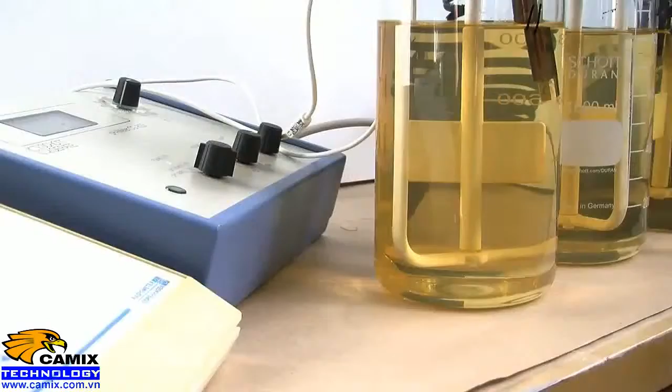On water and wastewater treatment. In addition to ordinary jar test apparatus and the most common analytic facilities, we have a few laboratory and pilot-scale apparatuses that can be used to demonstrate the most common processes and operations in water and wastewater treatment.

In this presentation, we'll introduce our pilot-scale waterworks, benchtop electroflotation cell, pilot-scale membrane filtration unit, and benchtop wastewater treatment plant based on the activated sludge process.

Here we have before us two glasses of water. On the left, a glass of water drawn directly from the Kyrö River, from which the city of Vasa takes its raw water. On the right, a glass of water that has been treated with our benchtop scale waterworks here at our laboratory at the Vaasa University of Applied Sciences.

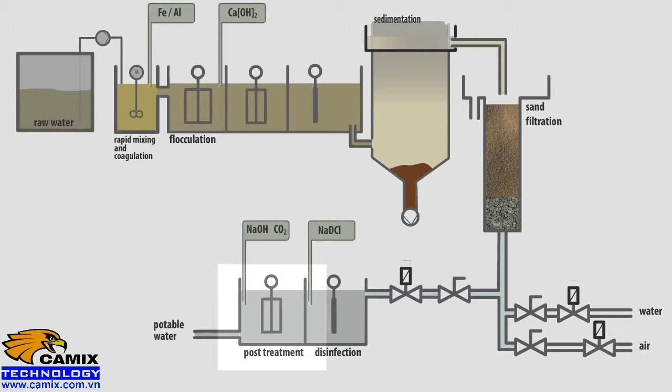The apparatus is fully automated using PLC control and handles the following unit operations and processes. The first stage, clarification, is basically an aesthetic consideration, as people prefer to drink clear, transparent water. The second stage, disinfection, is fundamental: removing pathogens from the water is part of basic healthcare infrastructure. The third stage involves post-treatment to protect the distribution piping from corrosion.

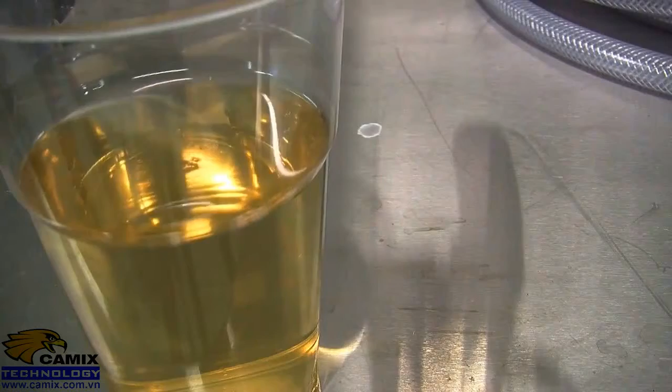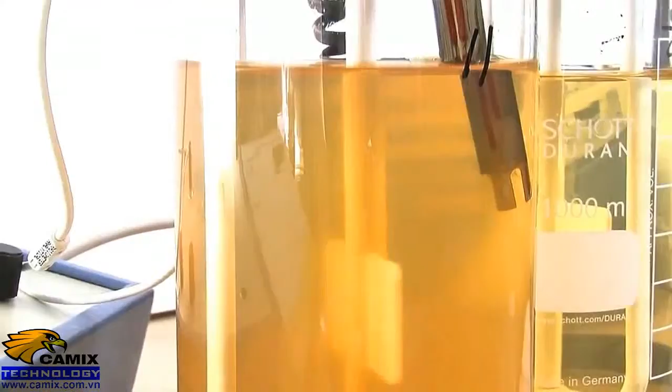The color and turbidity of river water is caused mainly by colloidal-sized clay particles and humic substances. Although the density of these materials is higher than water, the particles do not sediment due to the small particle size. Chemical precipitation using iron salts encourages humus and particles to coagulate, forming bigger flocs that can be separated out.

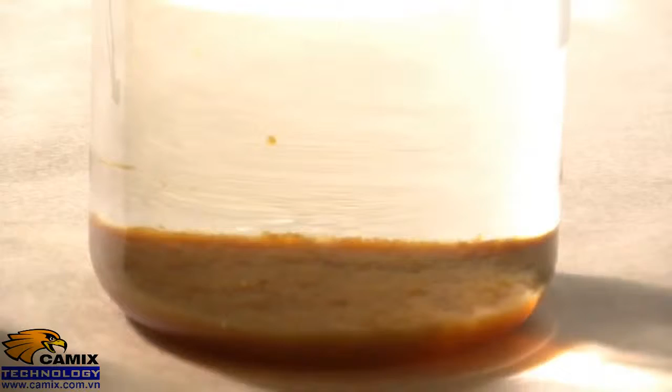The first step involved in chemical precipitation is coagulation, the destabilization and initial coalescing of colloidal particles occurring on an extremely short time scale during the rapid mixing stage through the action of iron sulfate, the PIX 322 commercial product of Kemira.

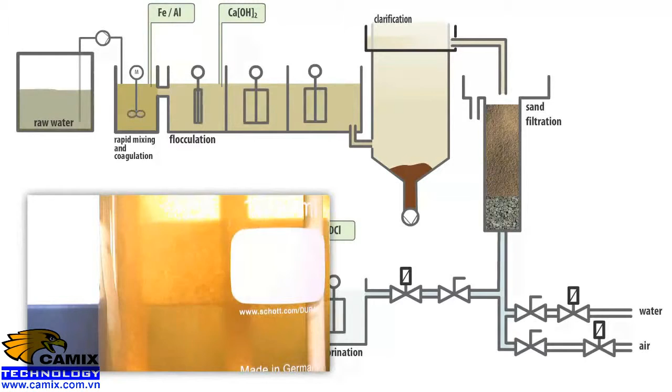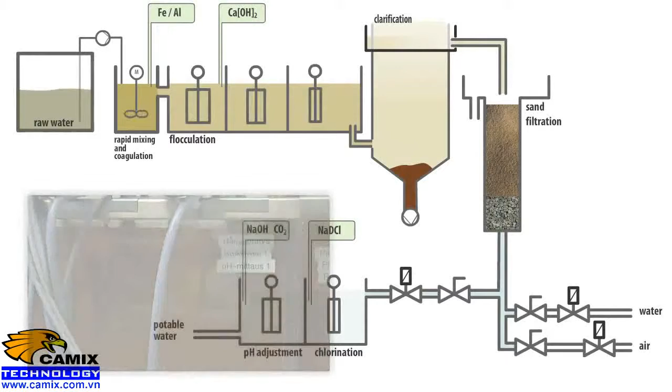Flocculation is the longer-term process of growing larger particles from smaller particles formed by coagulation. During the low-intensity mixing in three consecutive basins, colloidal particles are bound to the resulting iron hydroxide.

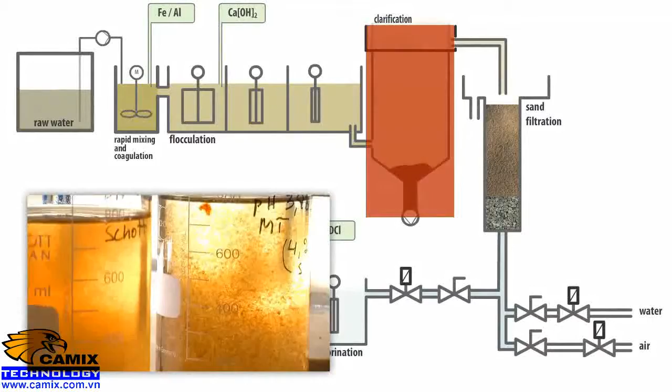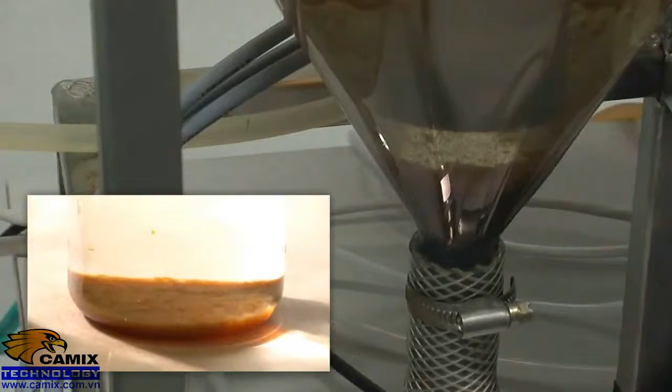During sedimentation, the iron hydroxide flocs entrapping the impurities are separated out by allowing them to settle to the bottom of a vertical flow clarifier. The flocs have a higher density than water and therefore tend to sink. The resulting sludge is pumped out from the bottom of the clarifier once every other hour.

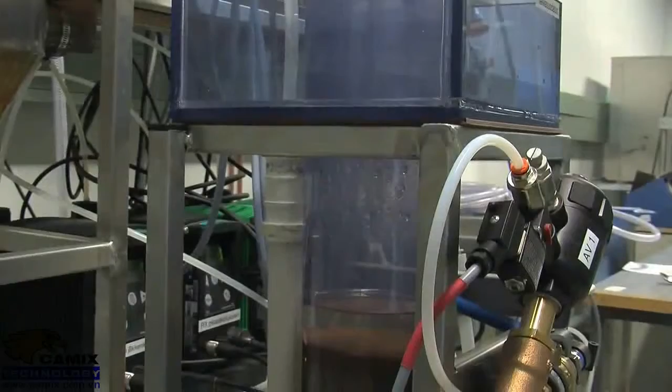The rapid sand filter separates the remaining flocs, those that were not trapped in the clarifier. The sand filter is set to backwash with tap water and air at predetermined times, once every 24 hours.

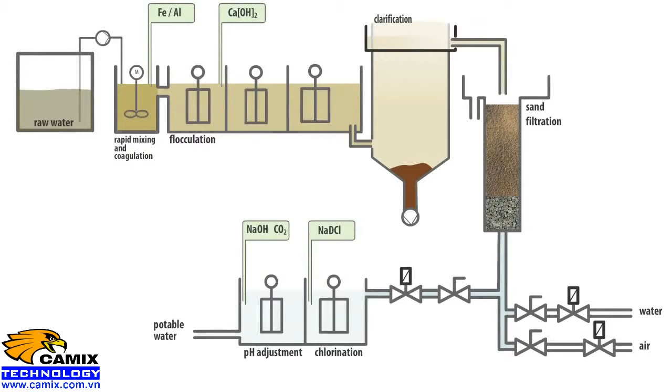After the chlorination stage, the pH value is adjusted by sodium hydroxide and carbon dioxide in order to protect the distribution piping from corrosion.

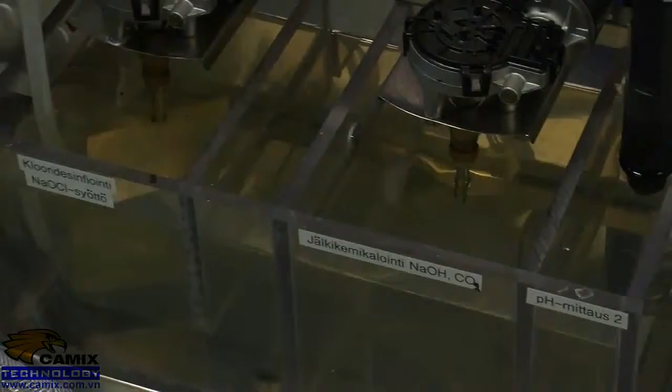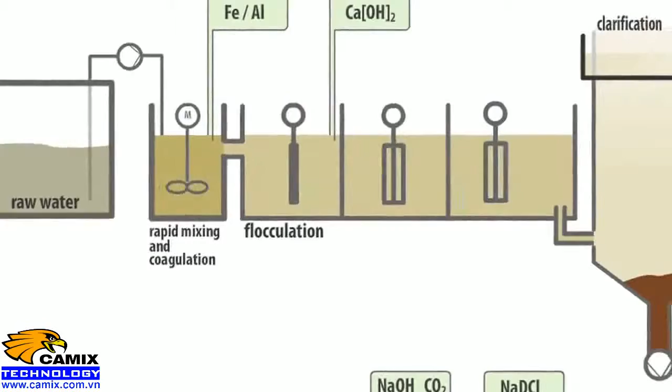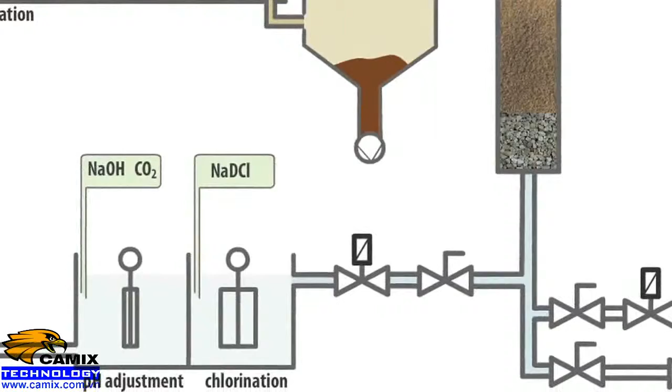The unit operations and processes demonstrated by our benchtop version are the basic elements in all treatment systems of surface waters. Depending on the installation and local conditions, various other unit operations, for example membrane filtration, may be included.

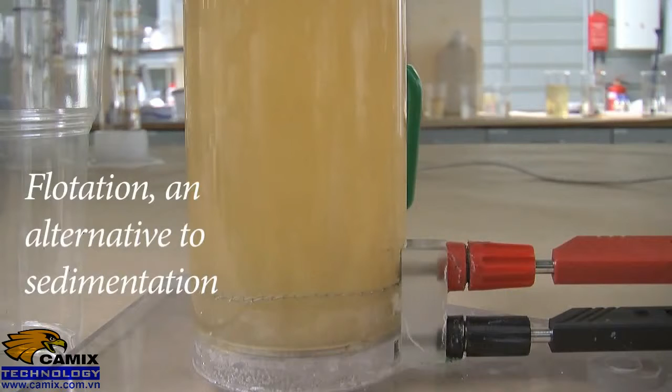As an alternative to sedimentation, clarification is often implemented by flotation. Flotation, in a sense, is the opposite of sedimentation. In flotation, the floc particles are induced to rise to the surface of the tank by entrapment of gas, usually air, within the mass of the floc.

The resulting floc-bearing foam is skimmed off the surface of the flotation cell, and clear water is decanted from a lower level of the cell.

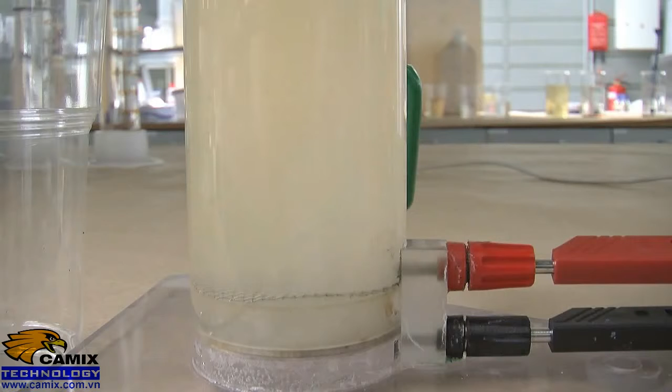In the laboratory of the Vaasa University of Applied Sciences, we have a laboratory-scale benchtop flotation cell. However, it is somewhat unconventional as it uses electrolytically produced hydrogen and oxygen as the flotation gases. Due to this electroflotation technology, the apparatus is small in size, highly portable, and convenient for even classroom demonstrations.

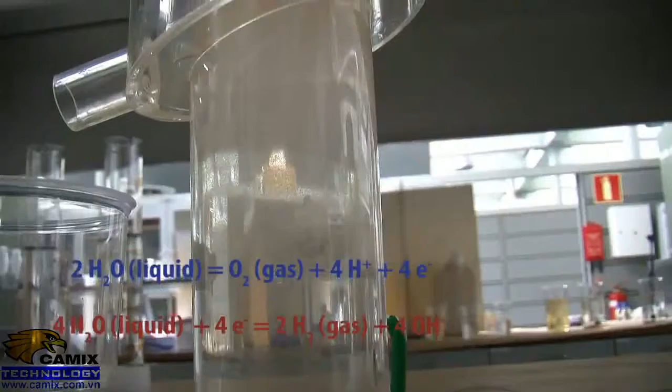In real-life applications, the main advantage of electrolytic gas production is the extremely small size of the gas bubbles produced. However, due to economic considerations, the technology is at present used mainly in niche applications.

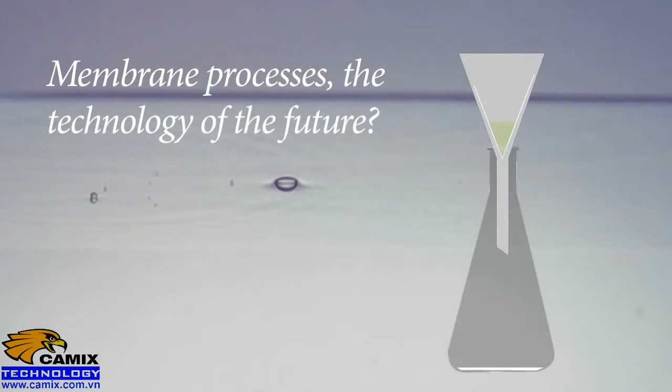Conventionally, filtration in water treatment refers to the separation of solid particles from water streams. Membrane filtration, however, extends this application to include the separation of dissolved solutes.

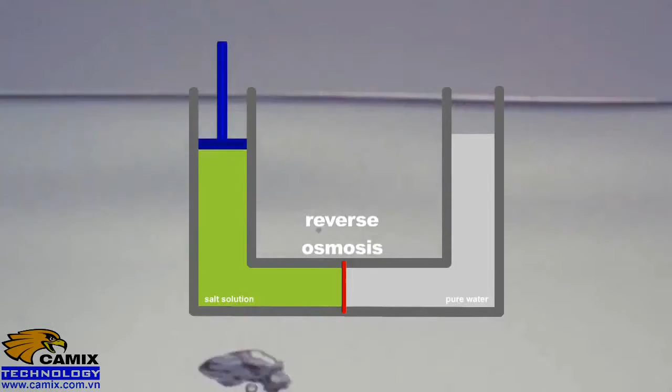Probably the best known membrane filtration technique is reverse osmosis, used for the desalinization of seawater. It consists of forcing seawater with a high-pressure pump through a semi-permeable membrane that allows the passage of water, but not of dissolved salts. This process is not a simple sieve separation, but the main mechanism is diffusion of solution through the membrane.

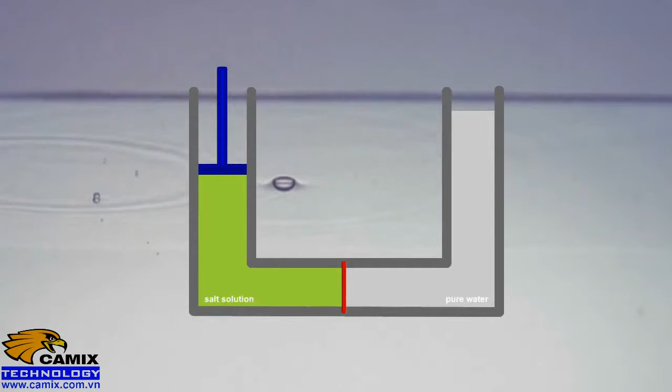Other more common pressure-driven membrane processes are microfiltration, ultrafiltration, and nanofiltration, which can be classified according to the mean pore size of the membranes and the operating pressure.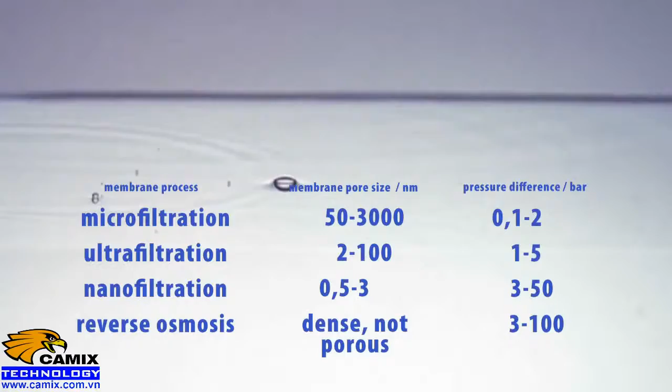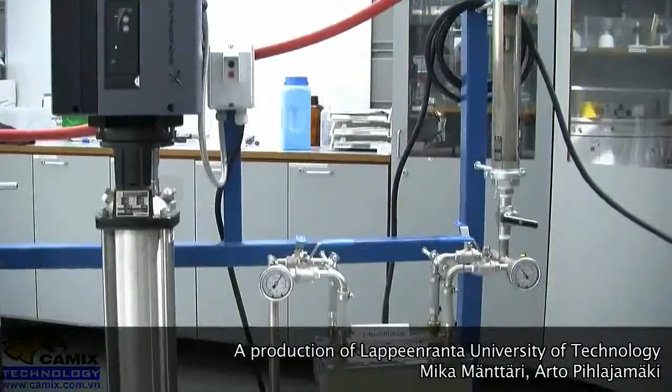In the environmental laboratory of the Lappeenranta University of Technology, we have a laboratory-scale membrane filtration apparatus which can be used to demonstrate all of the above-mentioned techniques.

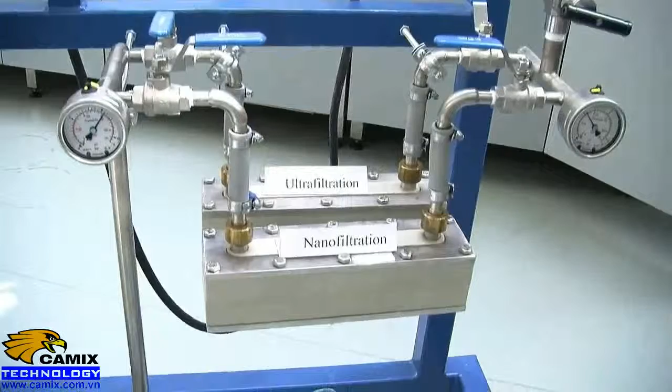Our apparatus is based on the cross-flow principle. In a conventional filter, flow is perpendicular to the filtering medium, and all flow passes through the medium. In a cross-flow process, however, the raw water is fed parallel to the filtering membrane, with only a certain proportion of the flow passing as a clear permeate through the membrane.

Thus, rejected material tends to be carried with the reject water, enriching the concentrate or being continuously removed from the filter module. One advantage of this implementation is that the flow is continuously flushing the membrane, retarding its fouling, that is, the accumulation of dissolved species at the membrane surface and in the pore.

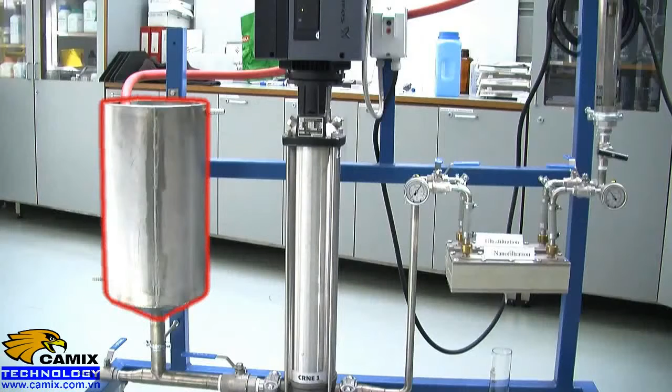Our apparatus consists of a 30-liter feed tank, one centrifugal pump producing operating pressures up to 16 bars, 2 parallel lines of water flow, 2 parallel flat sheet membrane modules equipped with pressure meters at both input and output ends, and a flow meter.

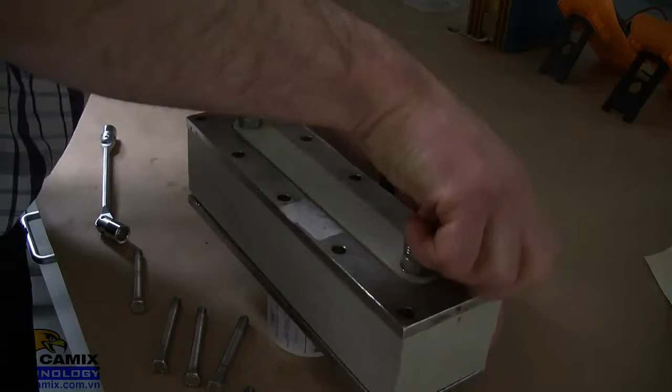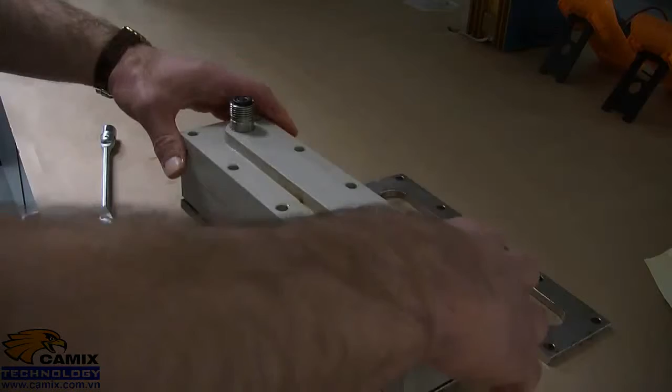The membranes can be easily exchanged as the flat sheet module is easily detached. The module consists of several components, and the filtration area is 68 square centimeters.

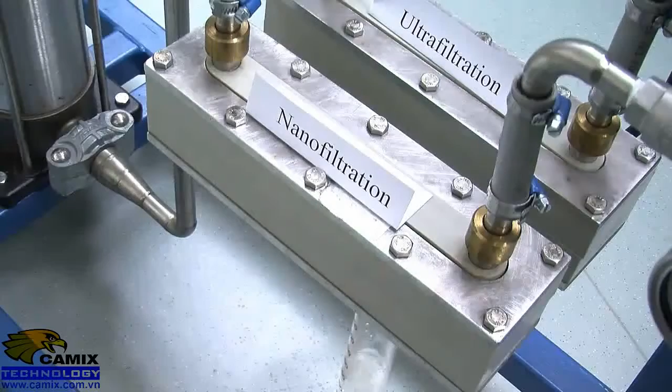In this demonstration, humic substances are removed from the raw water. We have a nanofiltration membrane in the front cell and an ultrafiltration membrane in the back cell.

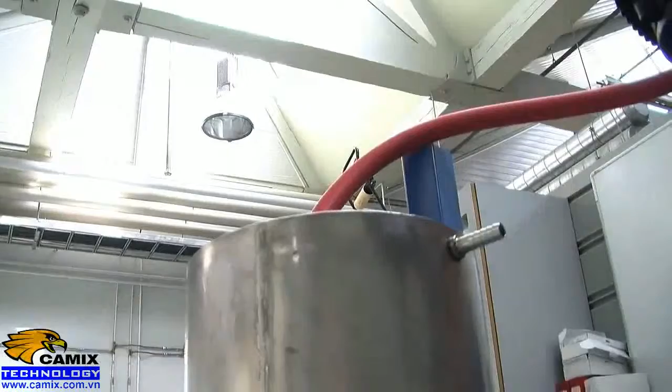The humic containing brownish raw water is pumped from the feed tank through the membrane module and the flow meter, and circulated back to the feed tank. The permeate is collected in measuring cylinders.

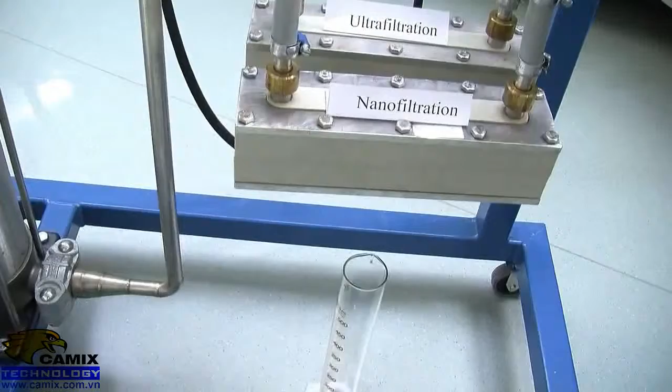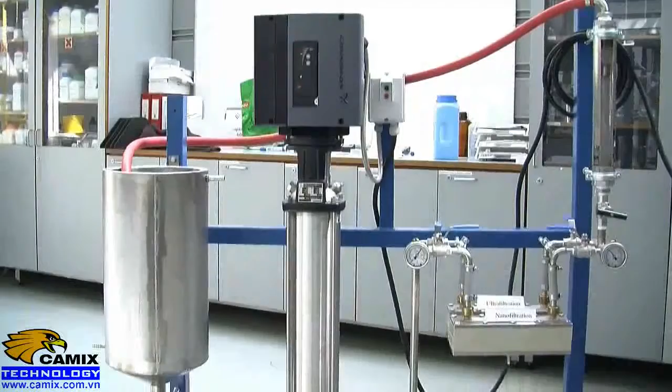As the membrane used in ultrafiltration is leakier, the permeate flow, and consequently the flux, is greater. However, nanofiltration removes a wider range of impurities.

Normally, the first goal of wastewater treatment is the mechanical removal of solids such as rags, twigs, scraps of food, and dead rats, by means of screens, sand traps, and sedimentation basins.

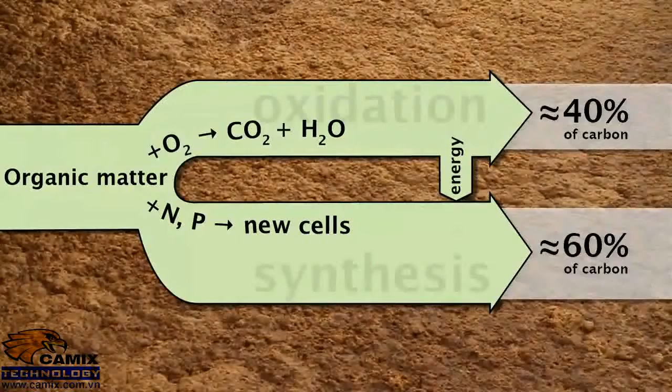Biochemical oxygen demand, that is BOD, is a measure of the concentration of biodegradable substances in wastewater. Organic compounds in effluents are rapidly oxidized by the catalytic action of microorganisms, in other words bugs, utilizing oxygen withdrawn from the air. If the BOD is much greater than the available dissolved oxygen concentration, all oxygen may be depleted.

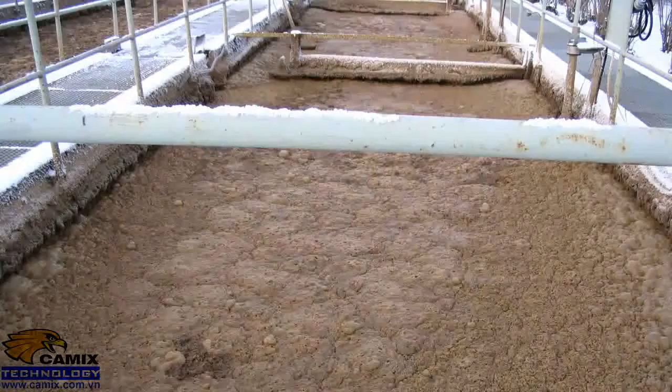In order to minimize the consumption of oxygen in the recipient water bodies, the second goal of the treatment is to oxidize the wastewater as completely as possible in the treatment plant.

Phosphorus and nitrogen are the key nutrients that cause enrichment of natural water bodies, giving rise to excessive growth of aquatic plants and algae, a condition generally known as eutrophication.

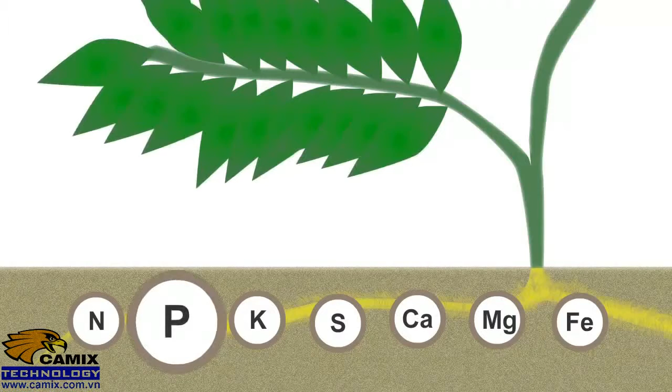In most freshwaters, phosphorus and nitrogen are the nutrients which limit growth because of their limited availability in the natural aquatic environment. Hence, the reduction of phosphorus and nitrogen to a low level is the normally specified third goal for wastewater treatment.

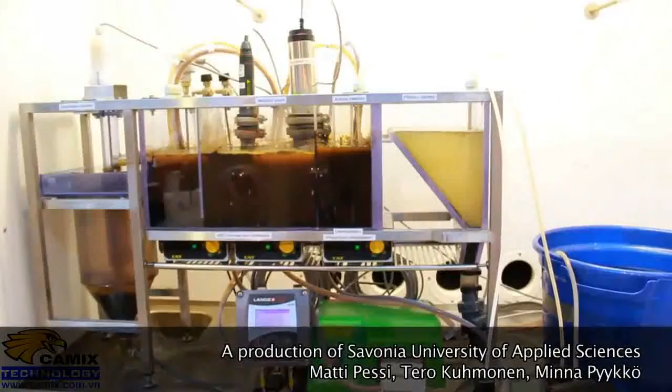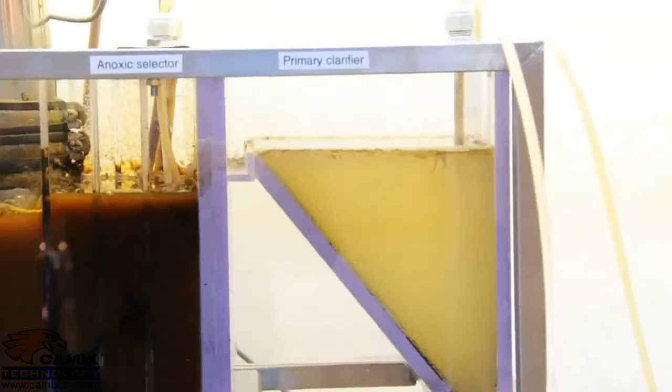In the environmental laboratory of the Lappeenranta University of Technology, we have a laboratory-scale activated sludge plant. Our benchtop apparatus consists of a primary clarifier, an anoxic selector, a 10-liter aeration basin, and a secondary clarifier.

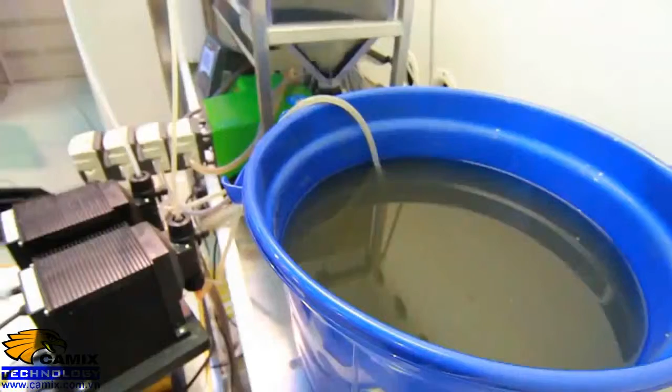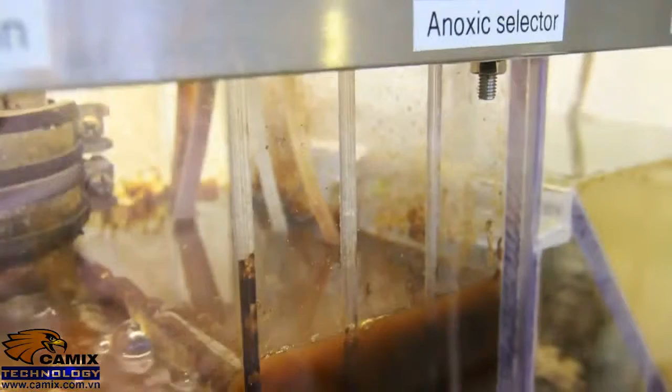The incoming effluent is pumped to the primary clarifier, then flows gravitationally via the anoxic selector to the aeration basin, where the microorganisms in the activated sludge take up and degrade dissolved organic contaminants in the effluent.

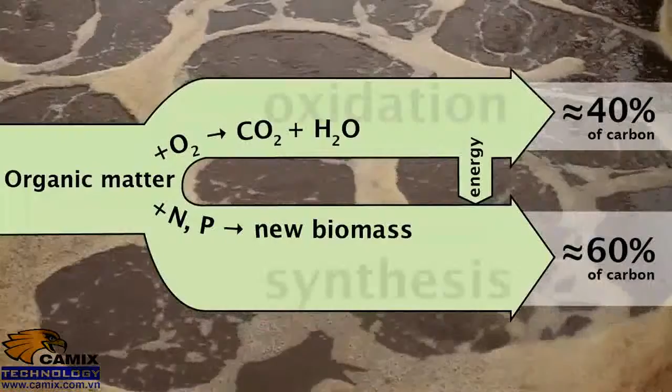This process consumes oxygen, which has been pumped into the basin, and results in the formation of carbon dioxide and new biomass, which must be periodically removed as excess sludge.

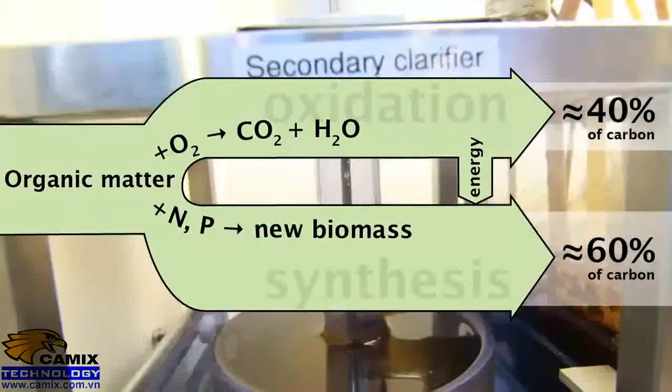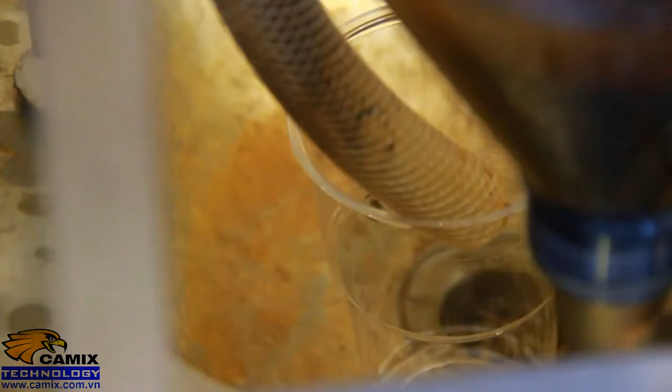From the aeration basin, the mixture of sludge and effluent flows into the secondary clarifier. The clear overflow is discharged into the recipient water, and the sludge taken from the bottom of the clarifier is returned to the anoxic selector to maintain a constant concentration of activated sludge in the aeration tank.

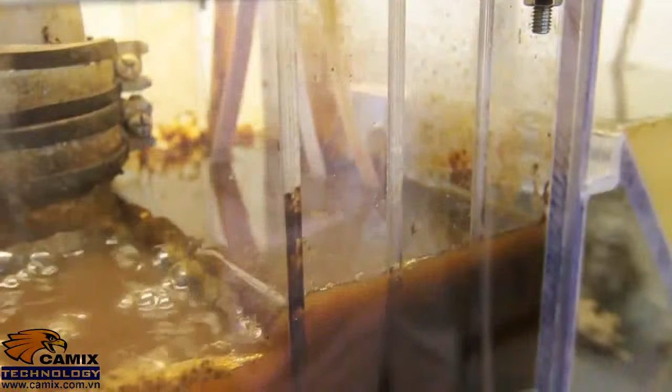In our apparatus, phosphorus removal is accomplished by precipitation using iron sulfate, which is dosed into the mixed liquor in the anoxic selector.

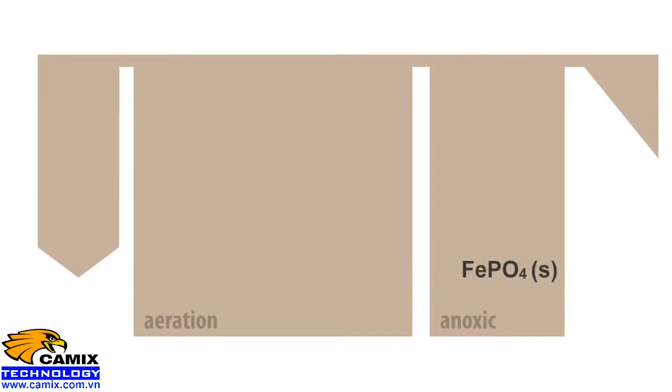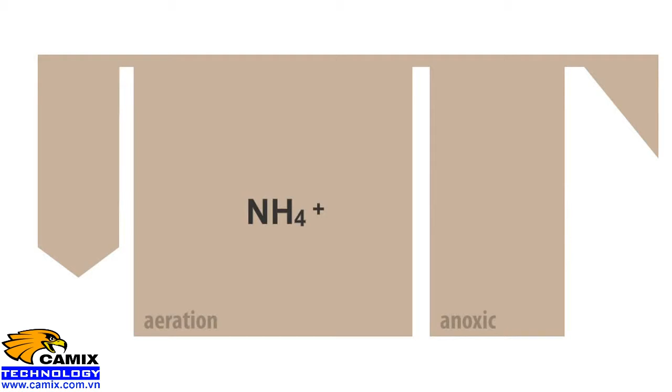All of the biological nitrogen removal processes involve an aerobic zone in which dissolved oxygen is used to convert nitrogen in the form of ammonium ions to nitrate ions. This oxidation process is called nitrification.

To complete the objective of total nitrogen removal, nitrate ions are reduced in the subsequent anoxic stage to gaseous nitrogen. Our apparatus utilizes the pre-anoxic configuration in which nitrate produced in the aerobic zone is recycled back into the anoxic compartment, which is situated between the primary clarifier and the aeration basin.

Such a process is usually referred to as a DN process, that is, denitrification nitrification.